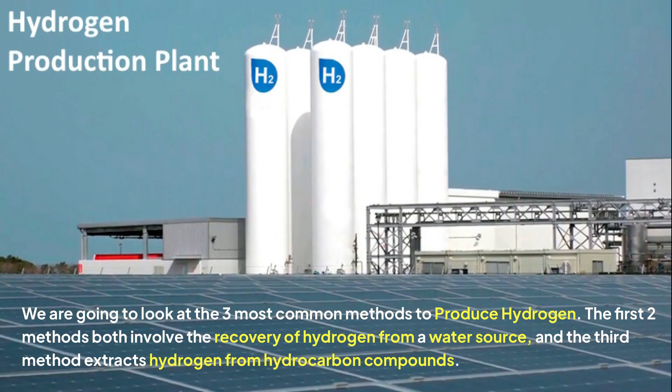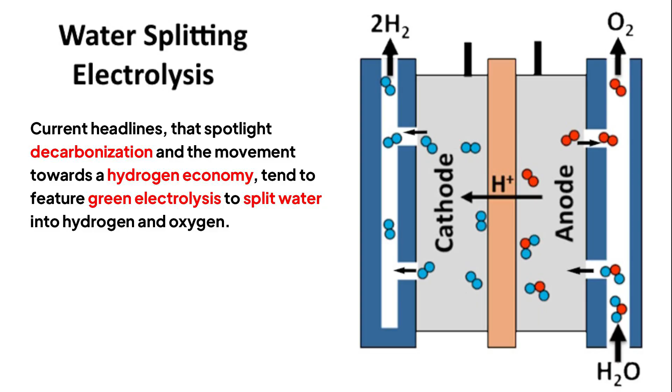We are going to look at the three most common methods to produce hydrogen. The first two methods both involve the recovery of hydrogen from a water source, and the third method extracts hydrogen from hydrocarbon compounds. Current headlines that spotlight decarbonization and the movement towards a hydrogen economy tend to feature green electrolysis to split water into hydrogen and oxygen. A less popularized method that we also rely upon to produce hydrogen is the chloralkali process of brine electrolysis.

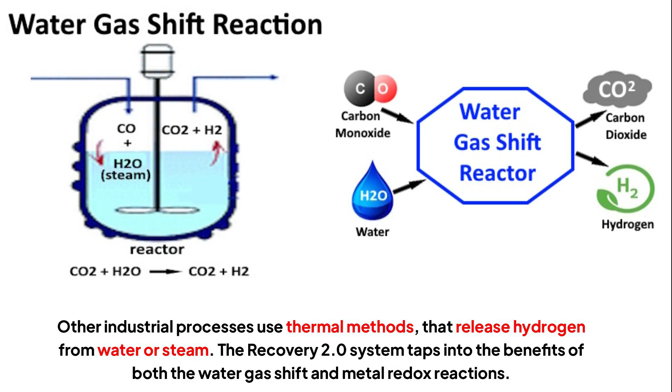Other industrial processes use thermal methods that release hydrogen from water or steam. The Recovery 2.0 system taps into the benefits of both the water-gas shift and metal redox reactions. In the third case, hydrogen is sourced by hydrocarbon cracking to release hydrogen from various hydrocarbon compounds. Some hydrogen production operations use a combination of methods, such as steam methane reforming, to generate hydrogen.

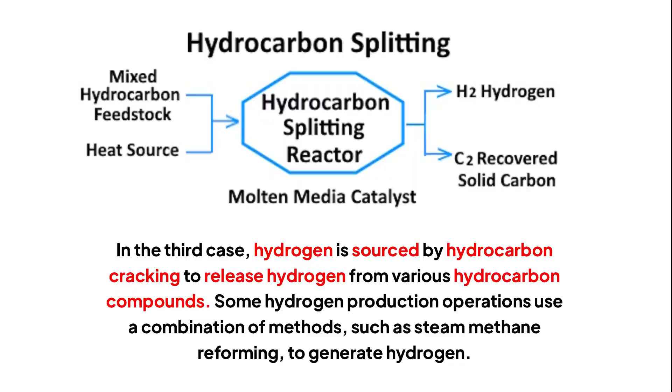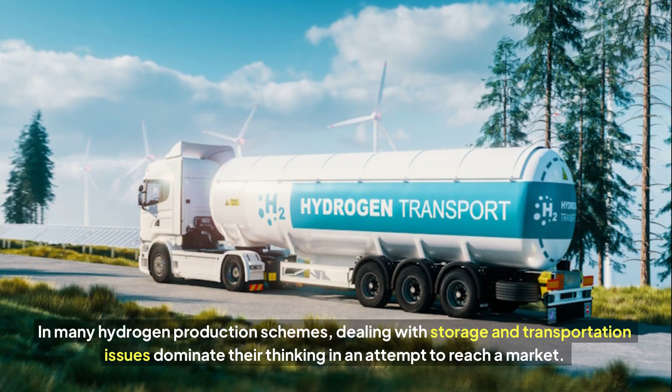The popularity of the idea of shifting to a hydrogen economy has spawned some new and innovative attempts to develop novel pathways towards hydrogen. In many hydrogen production schemes, dealing with storage and transportation issues dominate their thinking in an attempt to reach a market. While it is an option to produce hydrogen for external sales, within the Recovery 2.0 process, we focus on the internal consumption, to use hydrogen as a reactant.

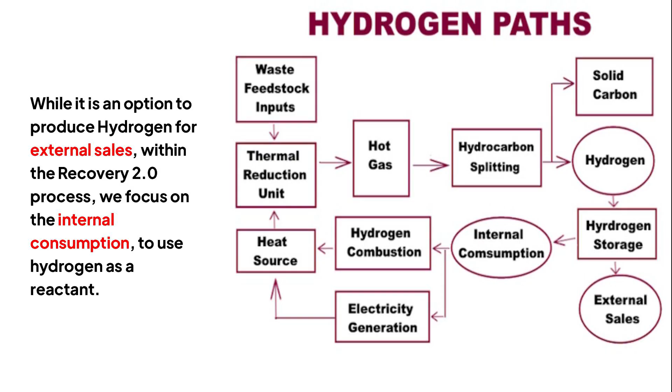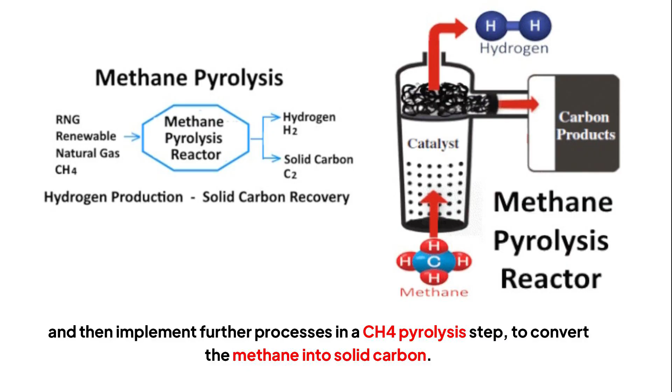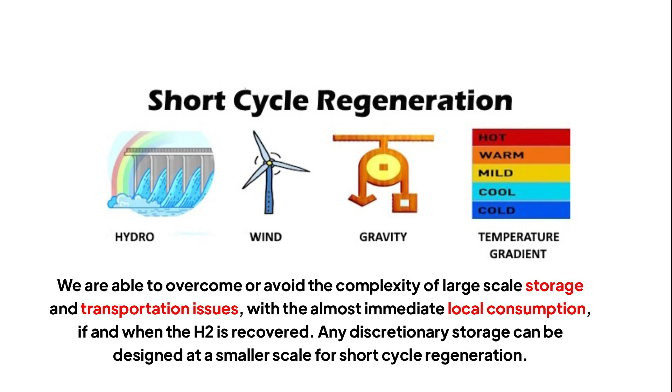Primarily in the CO2 management strategy, we use hydrogen or H2 to perform a synthetic methane conversion. And then implement further processes in a CH4 pyrolysis step, to convert the methane into solid carbon. We are able to overcome or avoid the complexity of large-scale storage and transportation issues, with the almost immediate local consumption, if and when the H2 is recovered. Any discretionary storage can be designed at a smaller scale for short-cycle regeneration.

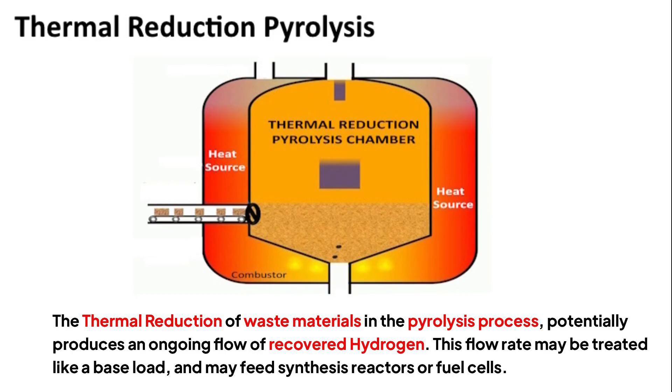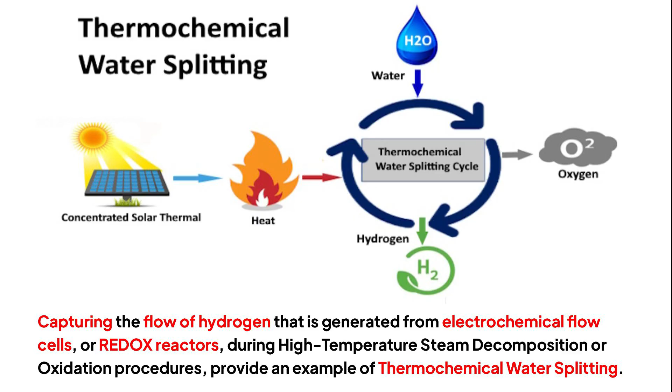The thermal reduction of waste materials in the pyrolysis process potentially produces an ongoing flow of recovered hydrogen. This flow rate may be treated like a base load, and may feed synthesis reactors or fuel cells. Capturing the flow of hydrogen that is generated from electrochemical flow cells, or redox reactors, during high-temperature steam decomposition or oxidation procedures, provides an example of thermochemical water splitting.

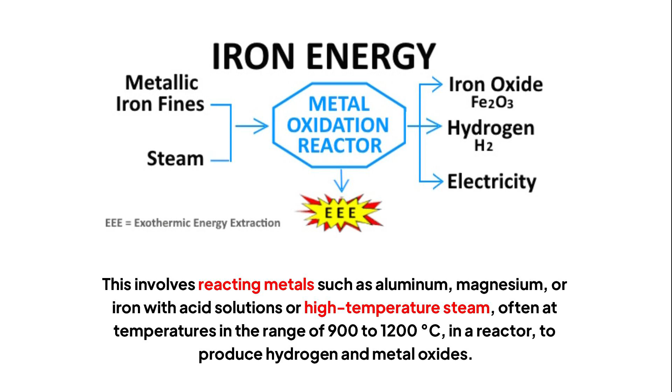This involves reacting metals such as aluminum, magnesium, or iron with acid solutions or high-temperature steam, often at temperatures in the range of 900 to 1200 degrees Celsius, in a reactor, to produce hydrogen and metal oxides.

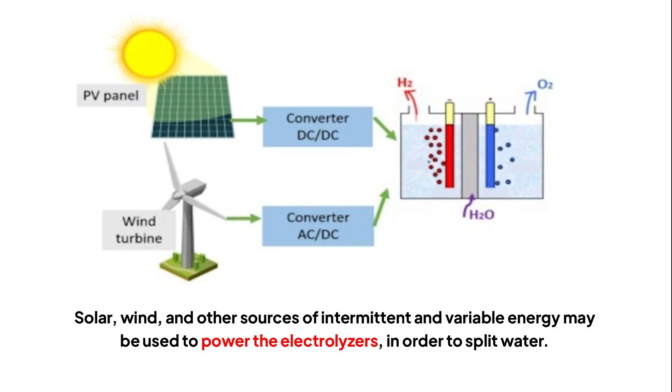Solar, wind, and other sources of intermittent and variable energy may be used to power the electrolyzers, in order to split water. Using battery storage banks allows for the distributed or buffered output of the intermittent sources to power the electrolyzers. Utilizing battery chemistries, such as iron or nickel-iron batteries, that utilize water-based hydroxide electrolytes, you may be able to take advantage of the unique properties of these devices to adapt to intermittent power sources.

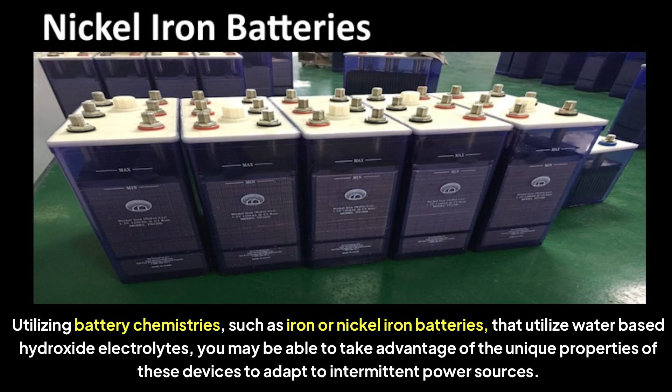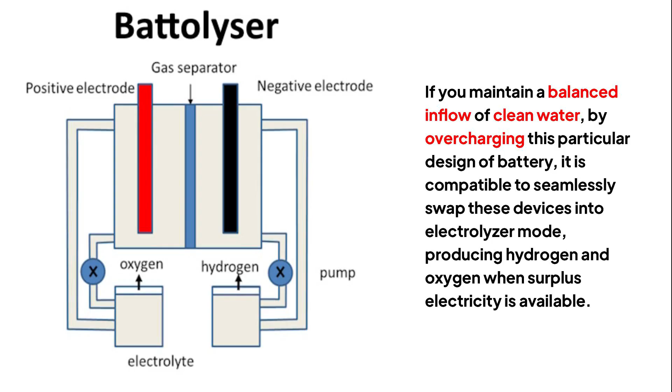If you maintain a balanced inflow of clean water, by overcharging this particular design of battery, it is compatible to seamlessly swap these devices into electrolyzer mode, producing hydrogen and oxygen when surplus electricity is available. By designing a bank of electrolyzers and battery storage sitting at the ready, you have the potential to provide the capacity as an electricity sink, with the ability to absorb excess intermittent energy and avoid curtailment.

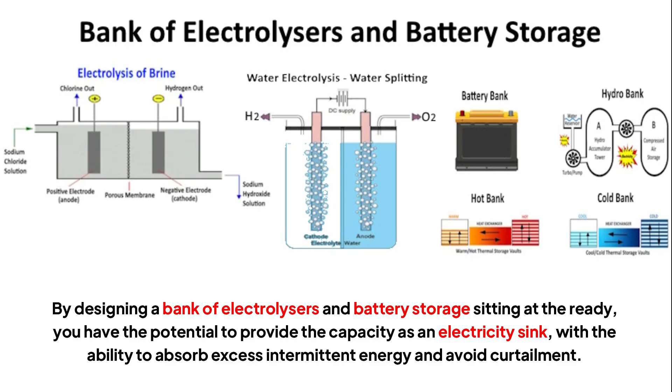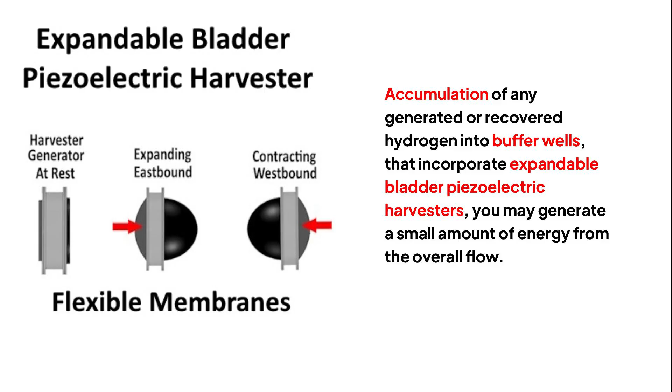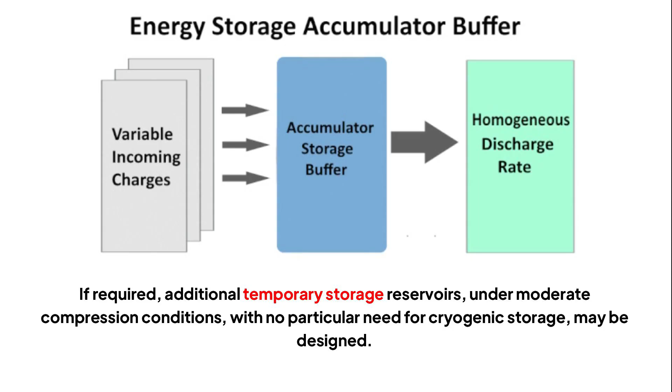By accumulating any generated or recovered hydrogen into buffer wells that incorporate expandable bladder piezoelectric harvesters, you may generate a small amount of energy from the overall flow. If required, additional temporary storage reservoirs, under moderate compression conditions, with no particular need for cryogenic storage, may be designed. The temporary storage reservoirs allow for the discretion to dispatch the bank of hydrogen, where and when it is required.

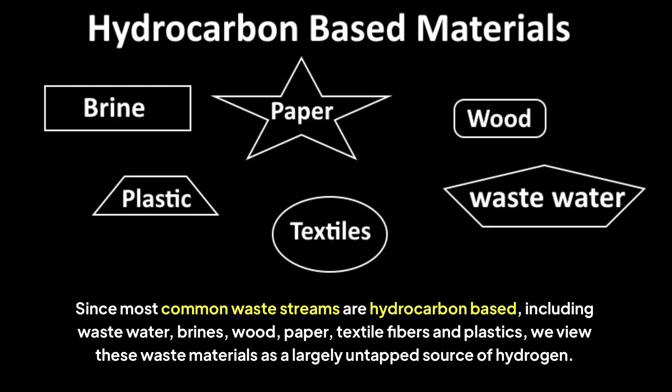Since most common waste streams are hydrocarbon-based, including wastewater, brines, wood, paper, textile fibers and plastics, we view these waste materials as a largely untapped source of hydrogen. The recovery of hydrogen and other essential resources, on a small scale or local basis, may be attractive in niche market applications, and may fulfill a desire for an independent supply, or to fulfill the requirements or need of a secure supply chain.

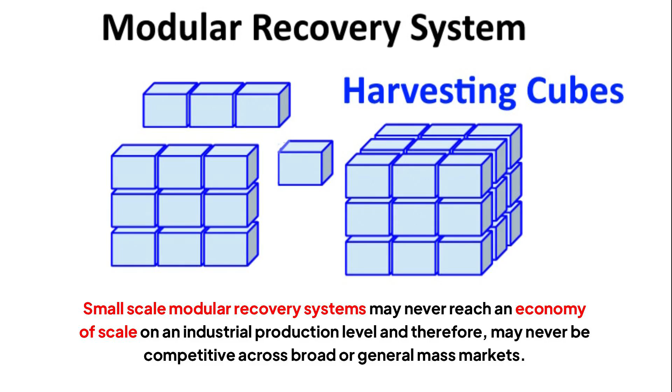Small-scale modular recovery systems may never reach an economy of scale on an industrial production level and therefore, may never be competitive across broad or general mass markets. In summary, the generation of recovered hydrogen from resource recovery applications may achieve the threshold by overcoming the challenges and become a reliable strategic supply source.